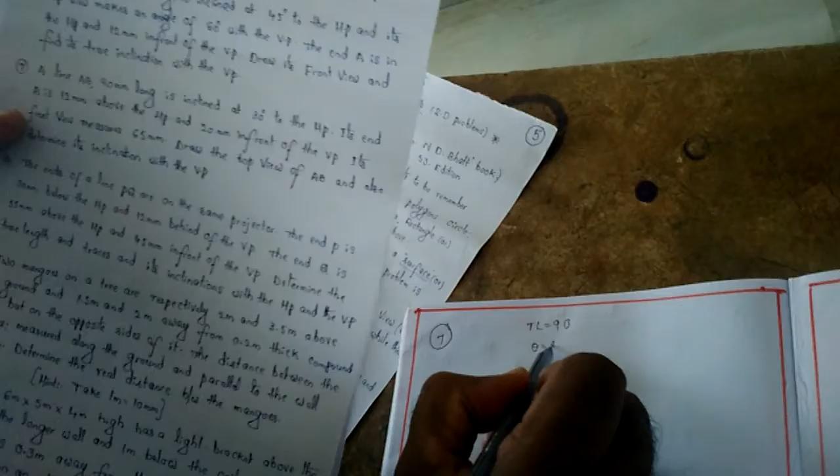Question number 7. The line AB, 90 millimeter long, is inclined at 30 degrees to the HP. So true length is 90 mm. Inclined to HP, that's why theta is 30 degrees. Its end A is 12 millimeter above HP, 20 mm in front of VP.

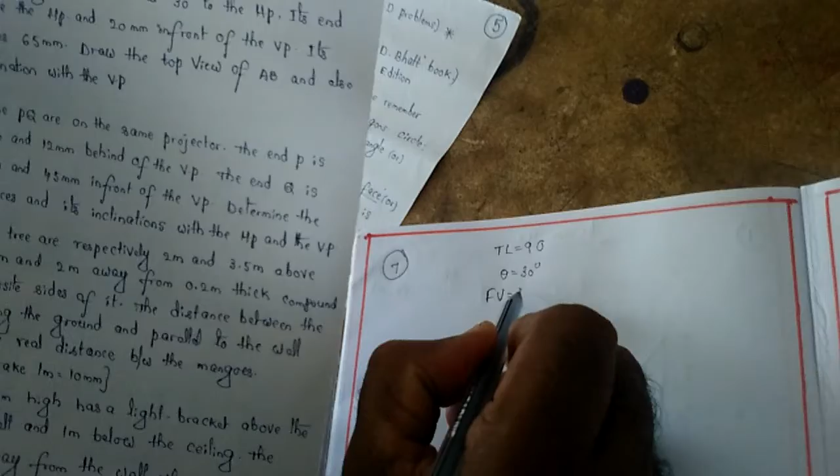Its front view length is 65 mm, given. So draw the top view and also determine its inclination with VP. Inclination with VP means phi. Phi is how much?

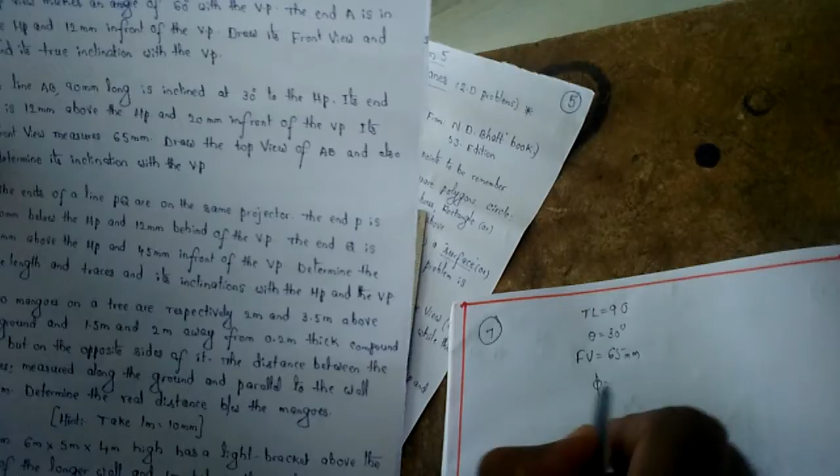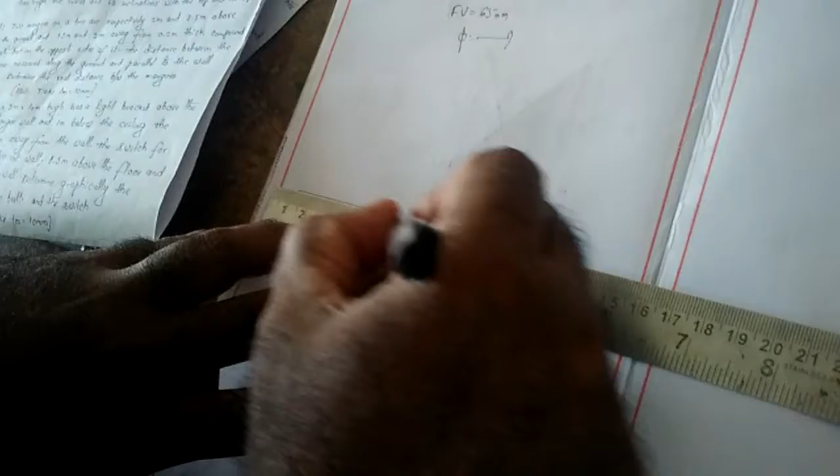First of all, draw the XY line. This is called the reference line, with H pencil. This is XY - this is VP and this is HP.

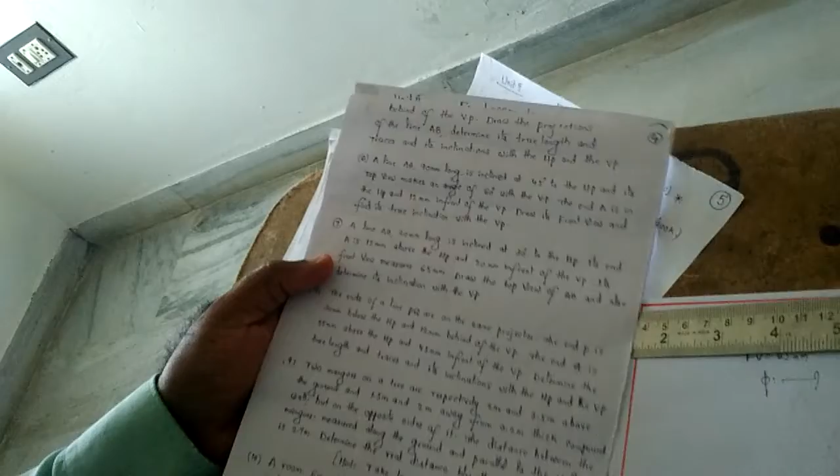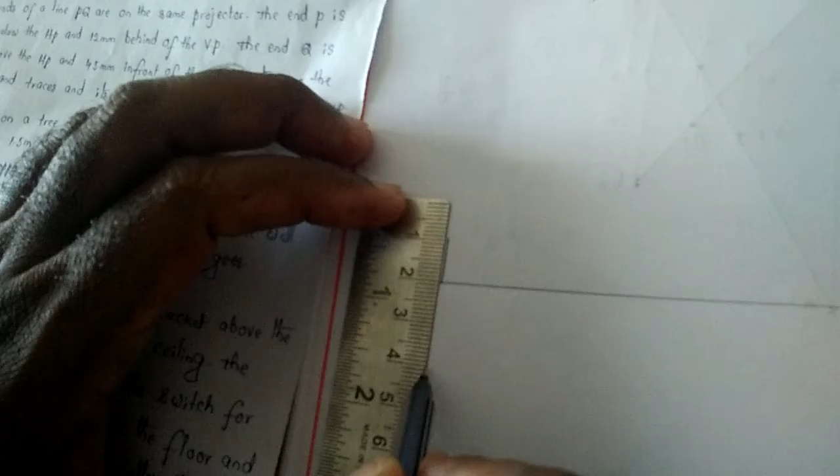First you want to allocate one end, A, which is 12 millimeter above HP, 20 millimeter in front of VP. So 12 above HP, next 20 in front of VP. So this is A dash and this is A. This gap is 12, but this gap is 20.

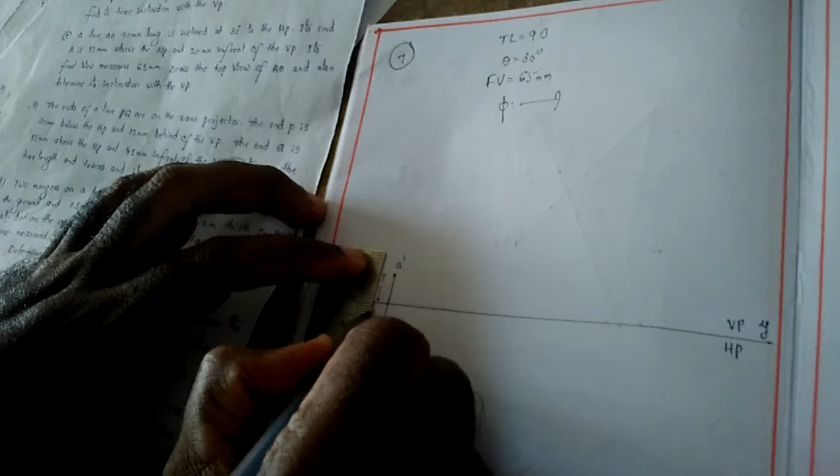So you want to put the arrow marks correctly - A dash and A. Its front view measures 65, but where we want to draw the front view we don't know yet. But line length is 90, inclined at 30 to HP.

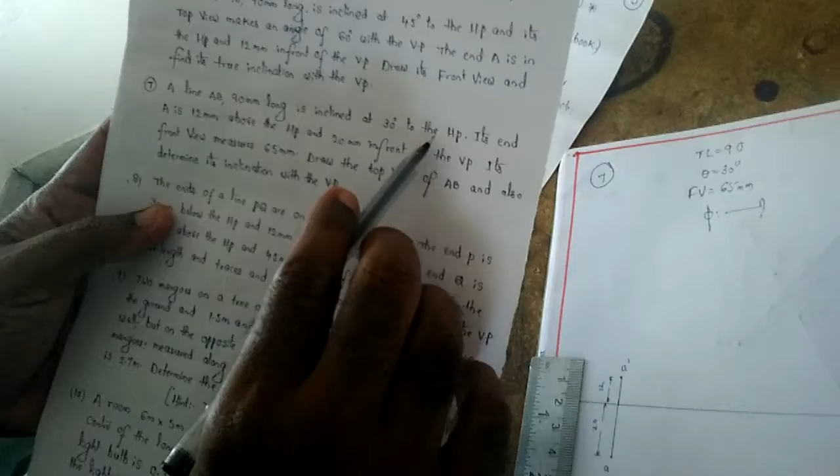So inclined 30 - at A dash, draw a line parallel to the XY line. This is locus of front view. Just draw it, how much length we don't know yet. At A, draw a parallel line which is parallel to XY, length unknown. Just draw two lines here.

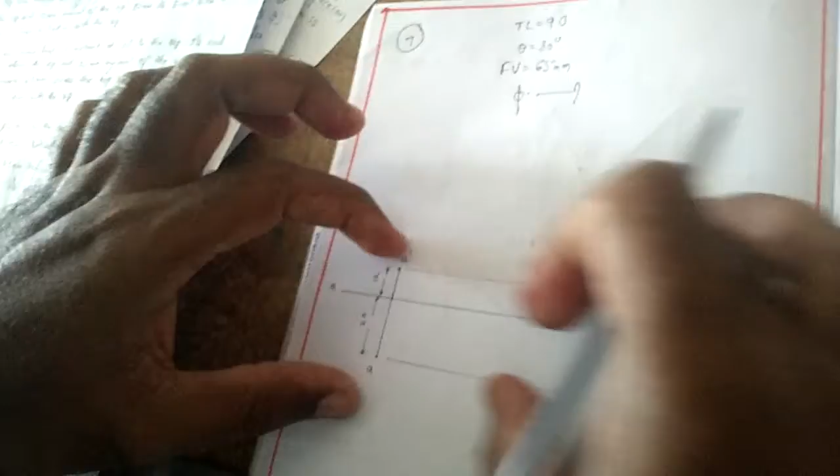Now here angle is 30. So take the protractor at A dash, put angle 30, extend the line. This is angle 30.

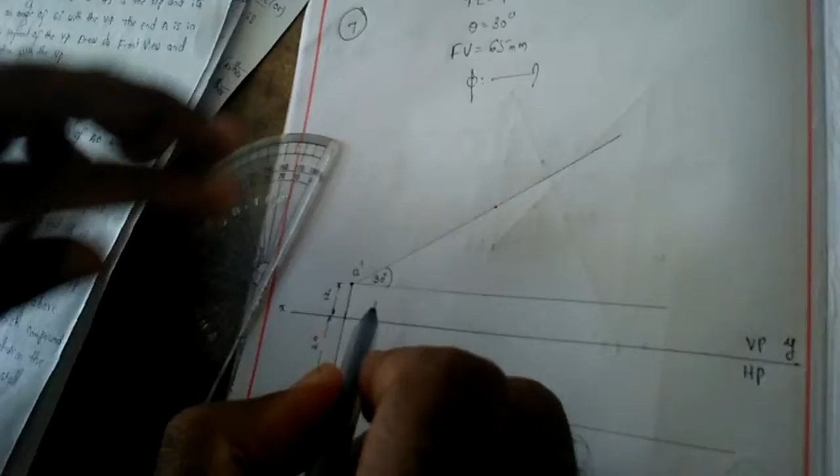Upon this line, true length is 90. So this is true length 90. By using compass, take 90 millimeter length, with A dash as center.

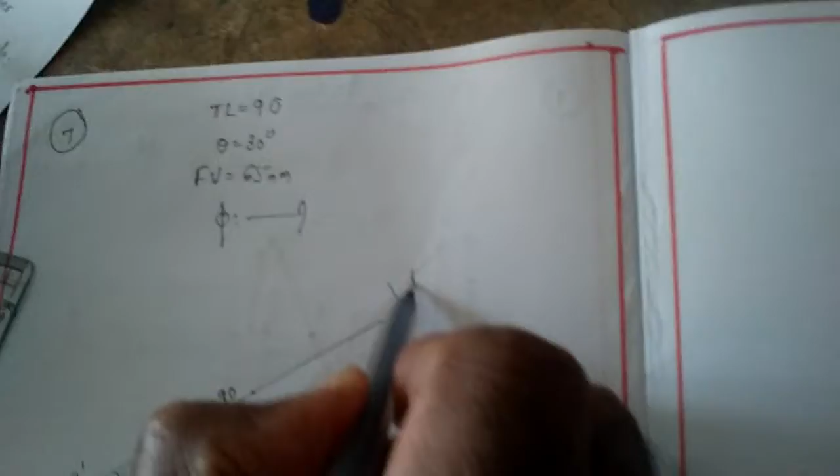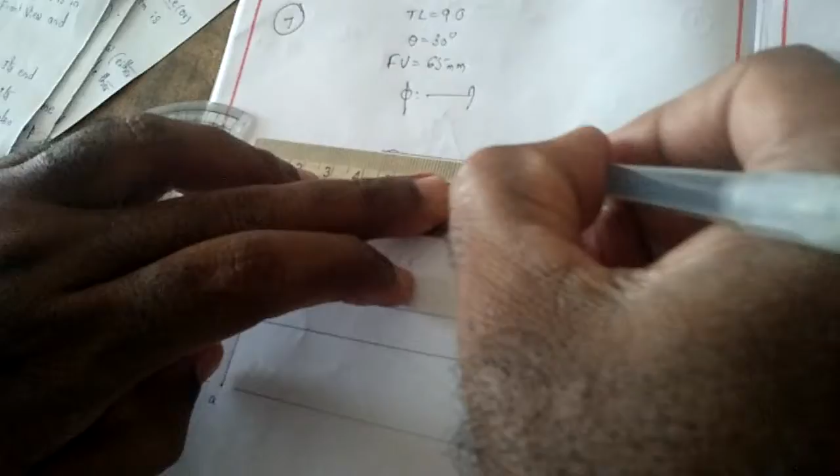Cut the line, so this is B1 dash. Once you got the B1 dash, draw a line parallel to XY. This is locus of front view line, because upon this line we want to get the front view also.

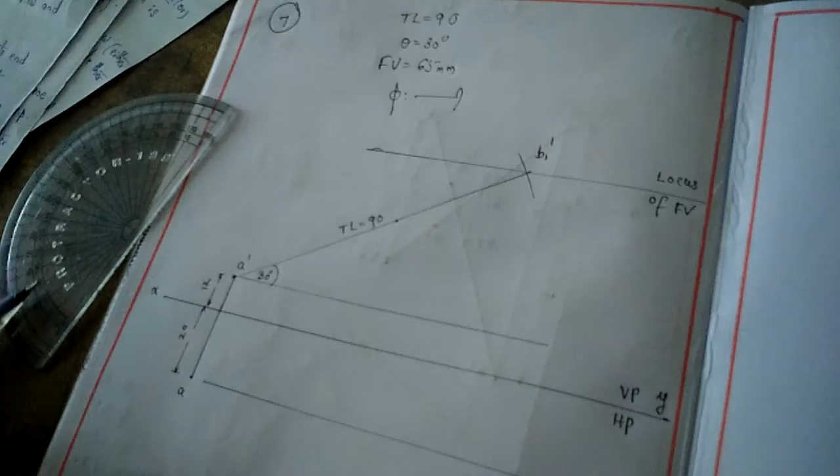So front view is 65. Take compass, length is 65, A dash as center, cut here. So here this is B dash.

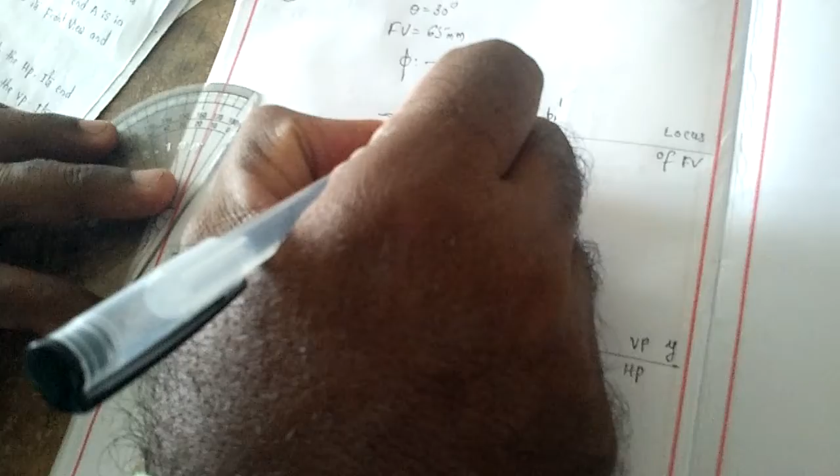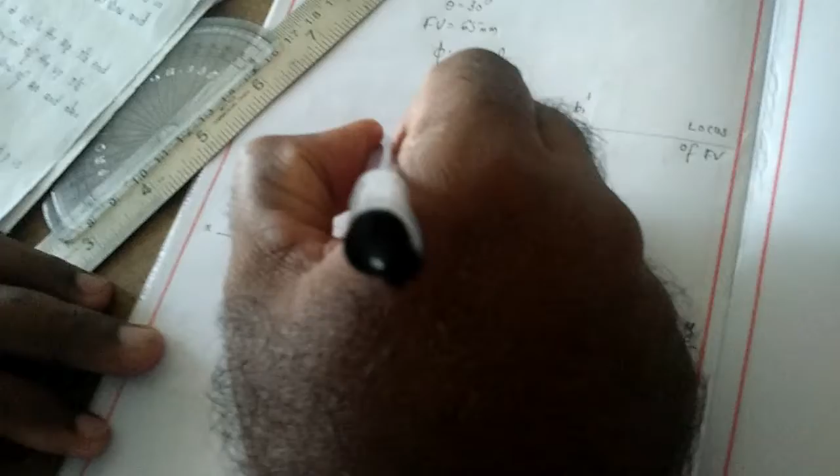B dash - you want to make it thick here, because this is the front view, which is 65. Remember that once the line is inclined to HP, true length is 90, but front view is 65. This is shorter than the true length.

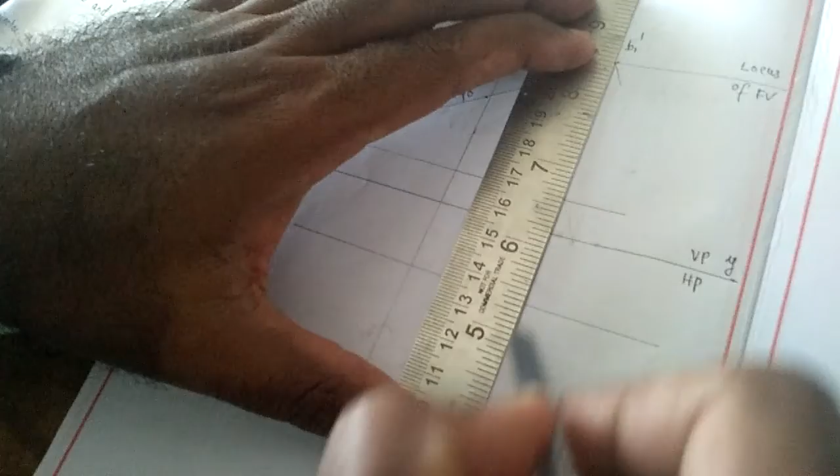So condition is satisfied. Once you got front view and top view, just draw vertical lines from B dash, length unknown, in this way. Afterwards, where the point cuts the true length 90, extend the line up to the top view side only - don't go more than that.

By using compass, A as center, this point is the radius, extend the line. It cuts here - that is the top view. So where it touches, that is the top view, the point we want to get.

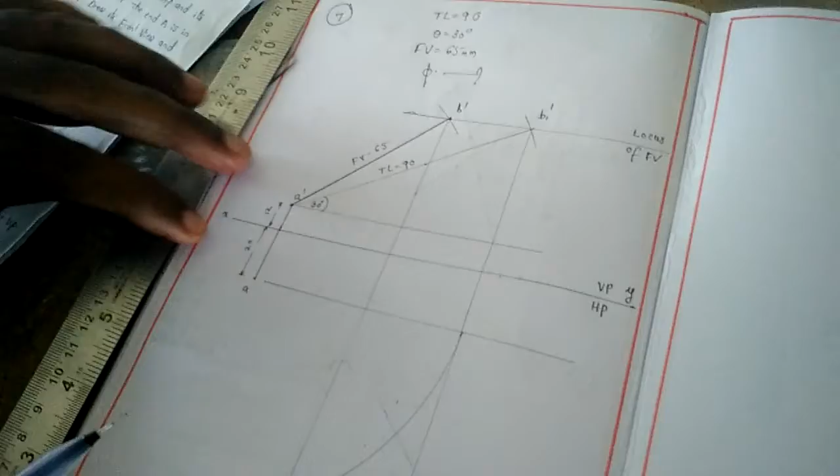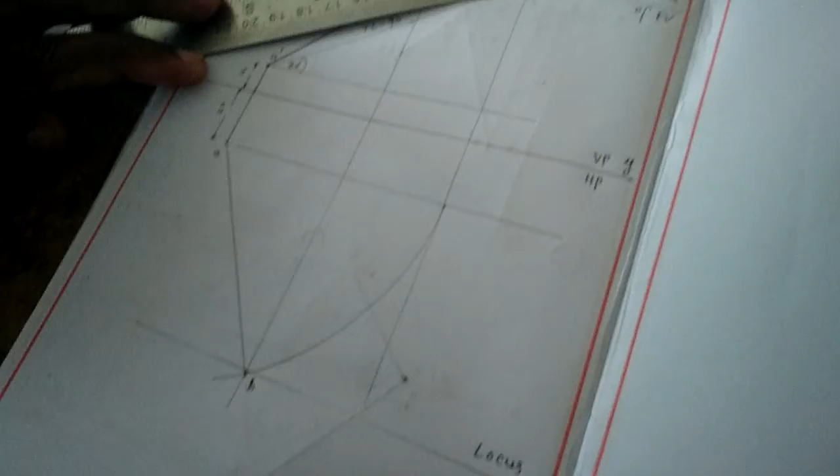So B - once you got the top view, draw a locus of top view line.

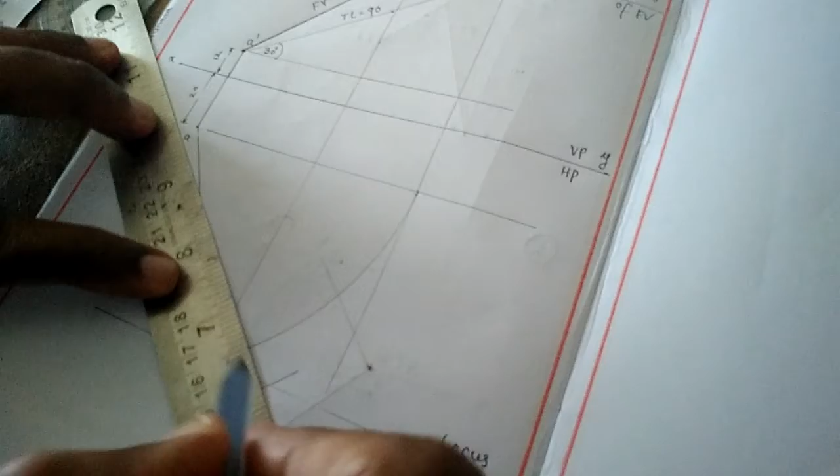But you already know the true length is 90. True length is cut in the front view side - same true length you want to cut on the top view side also. A as center, 90 radius, cut this line, then join them. Here this is B1.

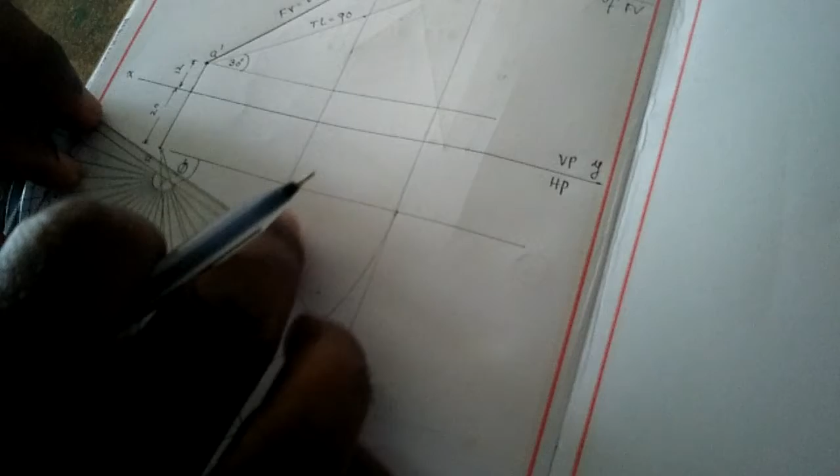So this angle is called phi - the line makes inclination with VP, that is phi. Now measure that phi angle with a protractor - 10, 20, 30, 40, 45 degrees. So phi equal to 45 degrees.

Because in this problem you're asked to determine its inclination with VP, phi equals 45 degrees. Front view is 65, so now take the top view line also, because front view and top view you want to make thick. So here, unnecessary lines you want to erase.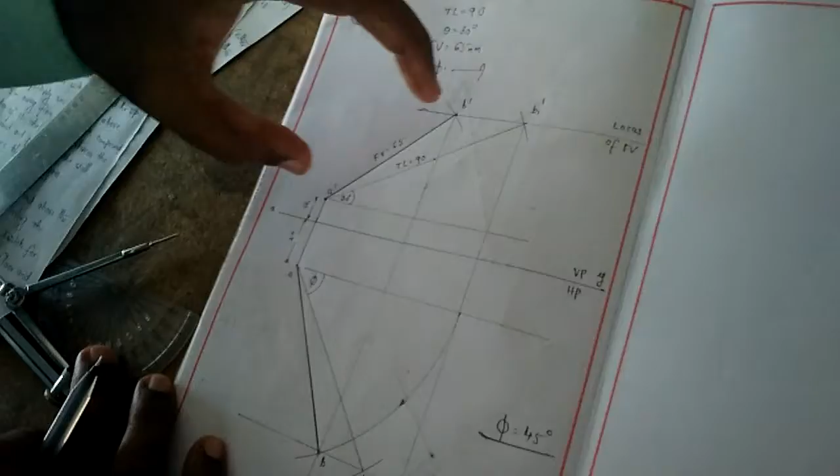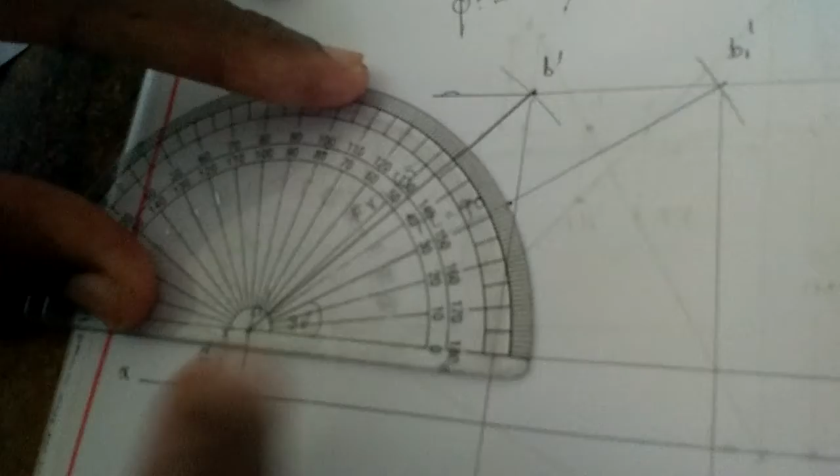So once the line is inclined to HP and inclined to VP, front view and top view both are shorter than the true length, shorter than 90. Suppose you want to find how much angle is made by the front view - the line makes angle with HP, but front view makes a different angle. Here, 20, 30, 40 - so 46 degrees is the angle the front view makes. This is alpha - alpha means 46 degrees.

This is the angle of inclination made by the front view with the XY line. Suppose the top view makes - here 40, 50, 55 degrees. So beta equals 55 degrees.

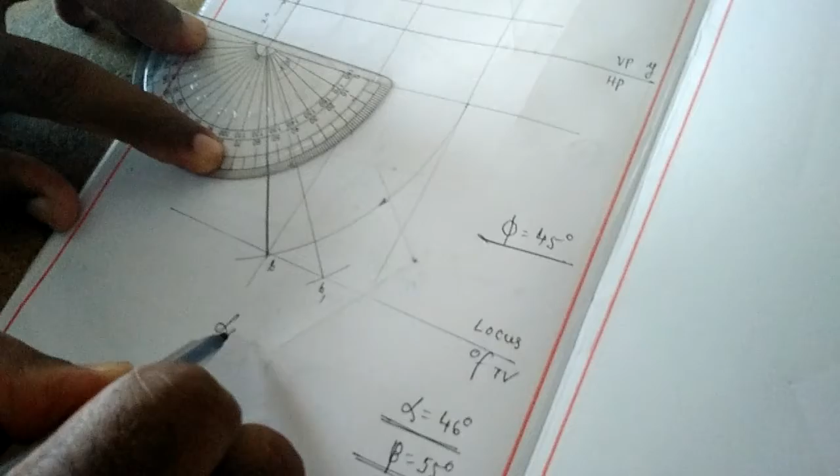Remember that alpha is greater than theta, beta is greater than phi. Always remember that if a line is inclined to HP and inclined to VP, alpha is greater than theta. Because alpha is 46, theta is 30, condition is satisfied. Beta is 55 and phi is 45, so beta is also greater than phi.

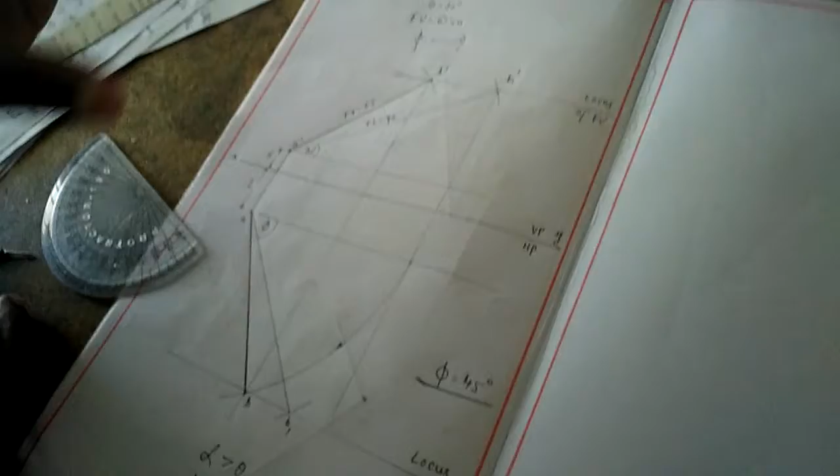In this way, for any problem with inclination to both HP and VP, you find the projections this way. Suppose you want to find the traces for this problem - extend the front view, it touches here, this is H. Then extend the top view line, upon that line draw vertical to get the HT.

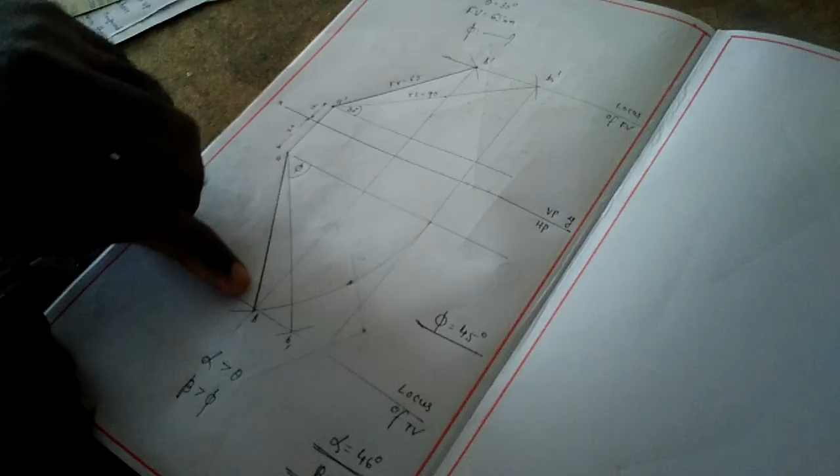Suppose you extend the top view here, you get V. Extend the front view, draw vertical line, get VT. So HT and VT - HT always lies upon the top view side and VT always lies upon the front view side. Simply extend in this way.

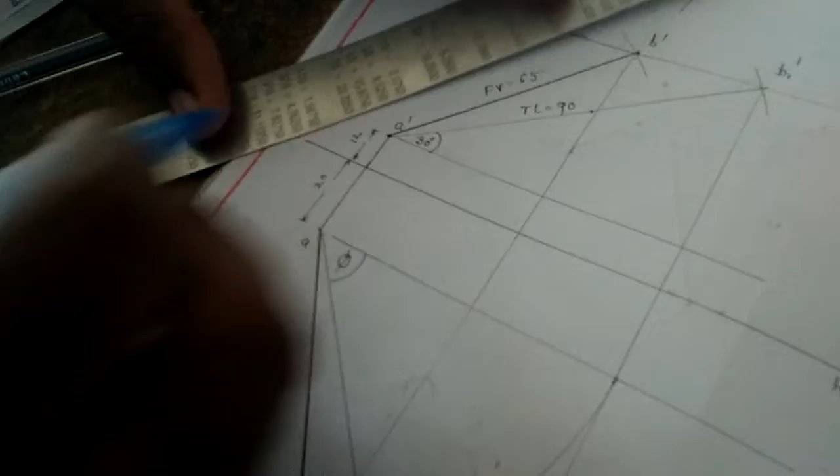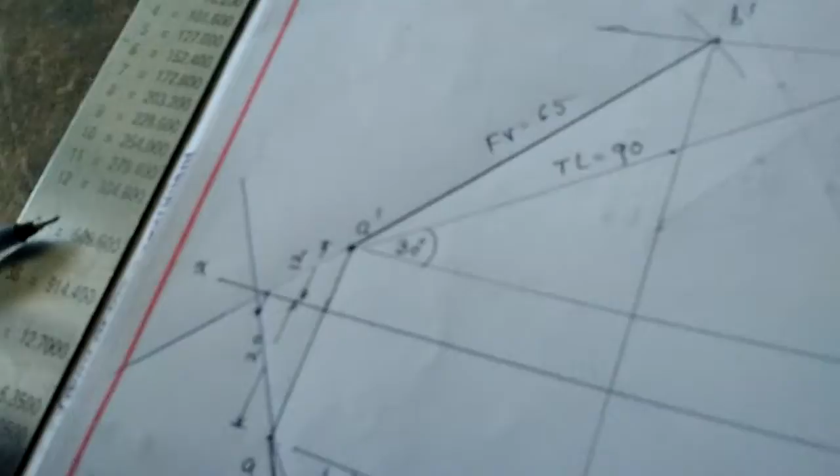Suppose you want to make the traces by extending - so here the front view intersects here, that is H. Draw vertical line towards HT, so this point is HT. Suppose the top view cuts here, this is V. Draw vertical line towards front view, this is VT.

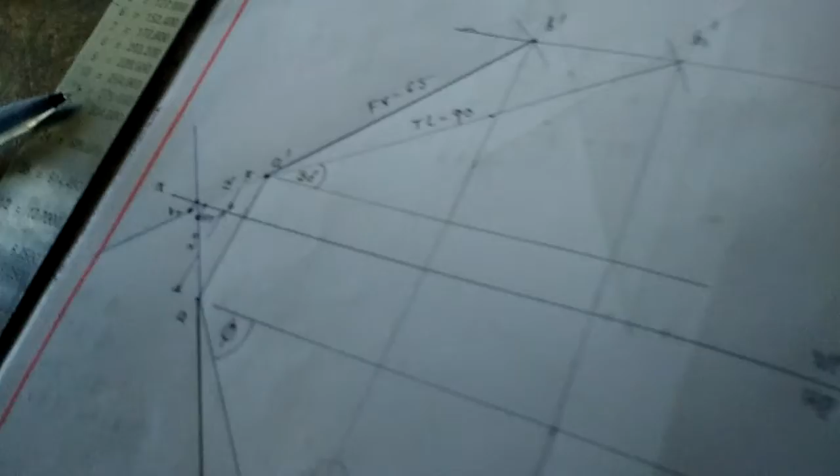Remember that upon the top view HT lies, and upon the front view VT lies - unless they ask for it, it's otherwise not necessary. In this way, if any line is inclined to HP and inclined to VP, you solve the problems this way.